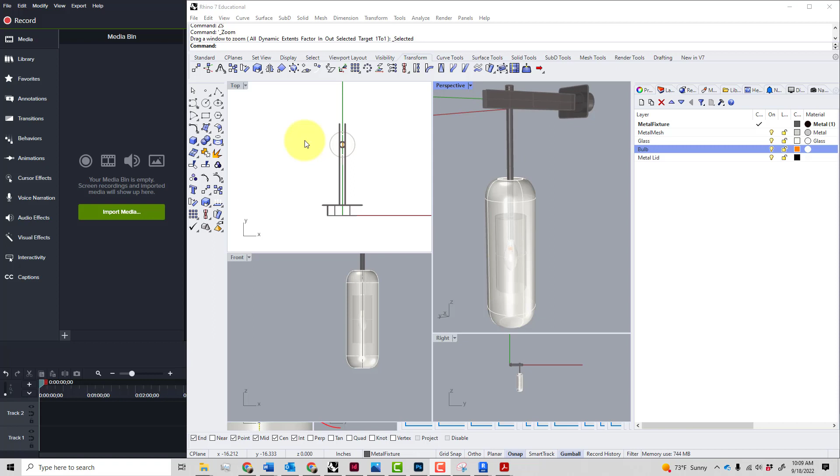So now that we've done the build of this light fixture in another video, here's the reference material I was using. The only things I haven't done yet are these clips. I haven't gone to that level of detail.

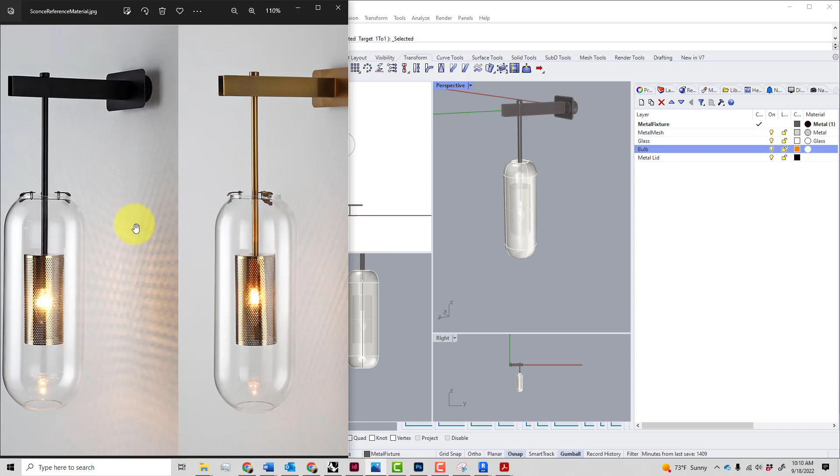The only thing that's not in the build video is I went ahead and put a lid on this. I wanted to see if I could block the light from going up. That's on its own layer because I don't want it to have the perforations. That's the other thing I haven't built.

It'd be really not fun to make a solid model that has perforations. In fact, it's counterproductive to render that. It'll take a long time, and there's other ways of doing it.

So we'll go into how to set up a material that will be able to handle a mesh like that, a perforation. The other thing I added since I made the video is this little orb in the center. There's not much going on there physically—it should just be the filament. But I'm playing with the idea that perhaps I can get a glow to happen right there that will hit the bulb.

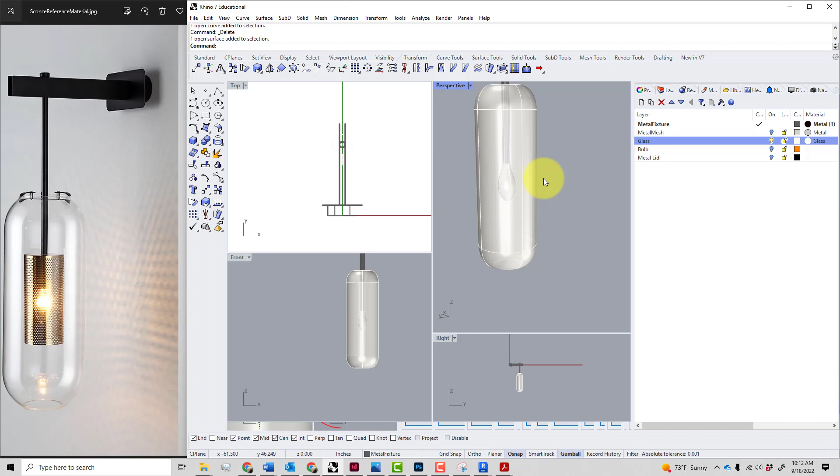All this is the glass. So I'm actually putting the glass bulb as still glass—that's that little orb I'm hoping I can get to look like it's glowing. And then that's that bit. So again, everything's set up, ready to go.

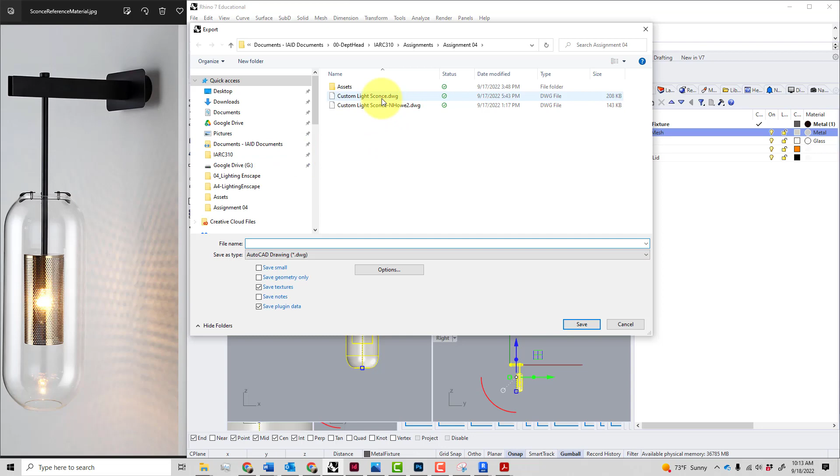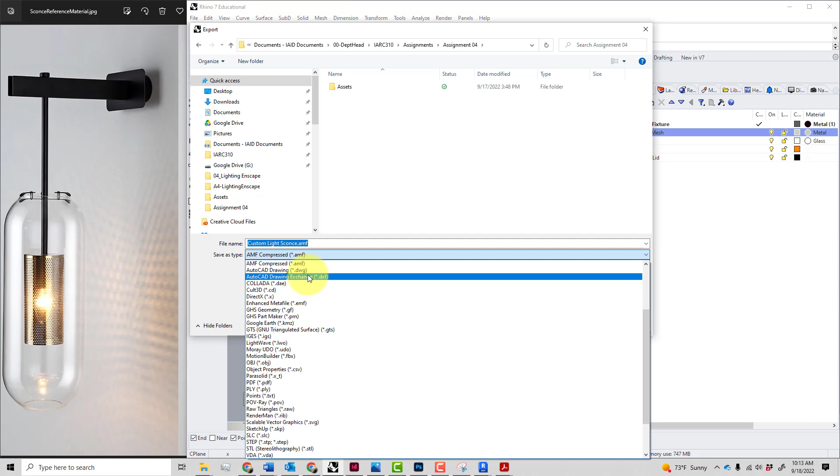Turn these things on, and our next move is just to select them, go up here to File, Export Selected, hit that, name it whatever you want. Make sure you're on DWG, not any of the Rhino formats. You'll want to be on DWG, and then go ahead and save.

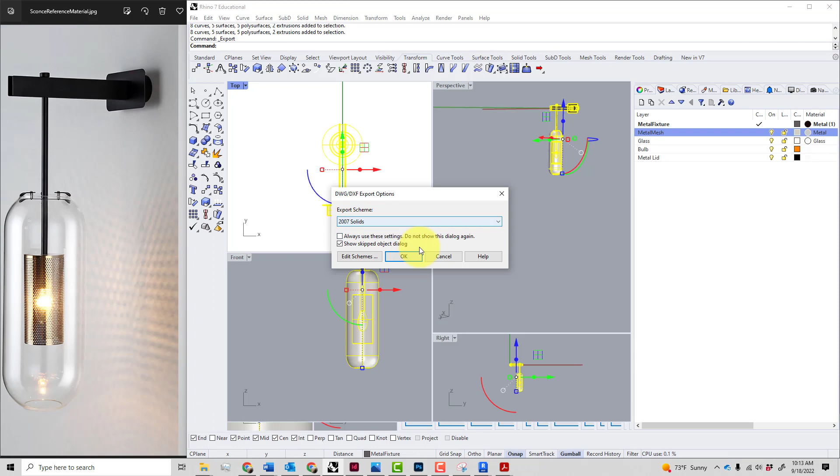When you get to this export schemes, you'll see you have a lot of different types. You'll want to still remain on the 2007 solids. It should be the default, but if it isn't, select that and say OK. That just makes sure you get solid information into the model, and it has some substance that can get materials out.

Okay, so that should be it in Rhino. You can do this with anything—furniture and whatnot. So just keep this workflow in mind.

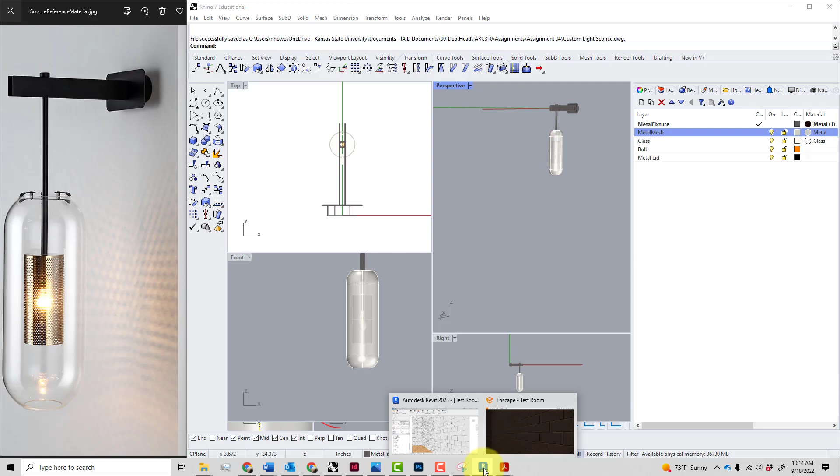Okay, so now we're going to be in Revit. What I want you to do is go ahead and go File, New, Family, and then under English Imperial, scroll down till you get to lighting fixture wall based. If we were doing a pendant, we'd want ceiling based. I've seen some videos that say you should always be face based.

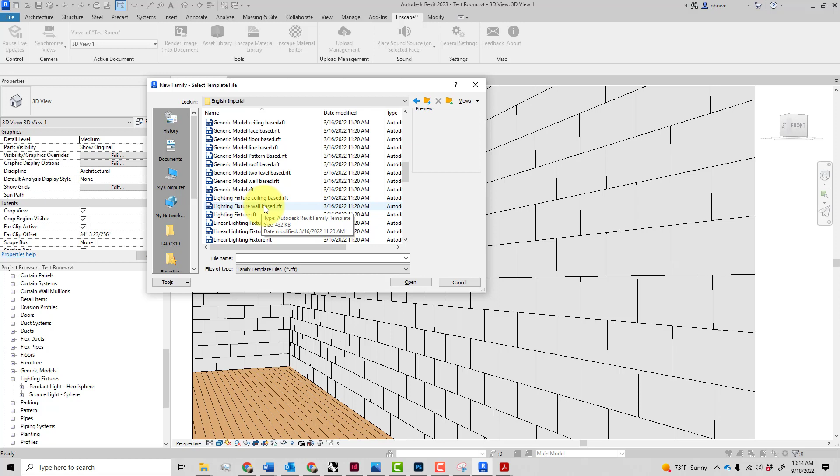I don't know, I think this will work, so we're going to use wall based. It's how any kind of sconce would have been built. So we say open that up, let's take a look. Alright, so you immediately see—

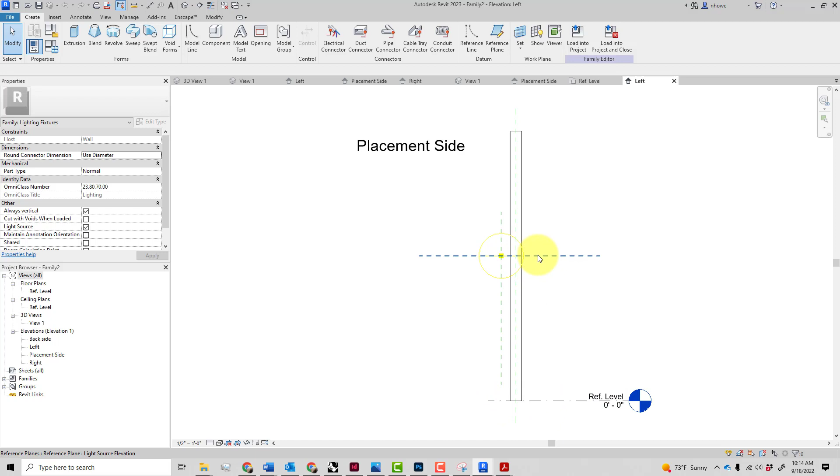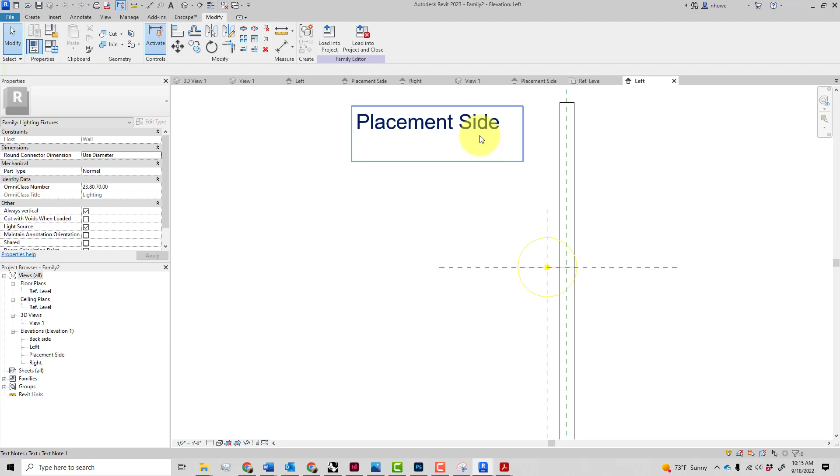We have the level, kind of the reference level—this is the floor. You have this light source elevation, you have your light source definition, and then you have placement side. In this case, whether you want it to be an interior, well it doesn't matter—wherever you're going to put the fixture, this is the side of the wall you want to place it on.

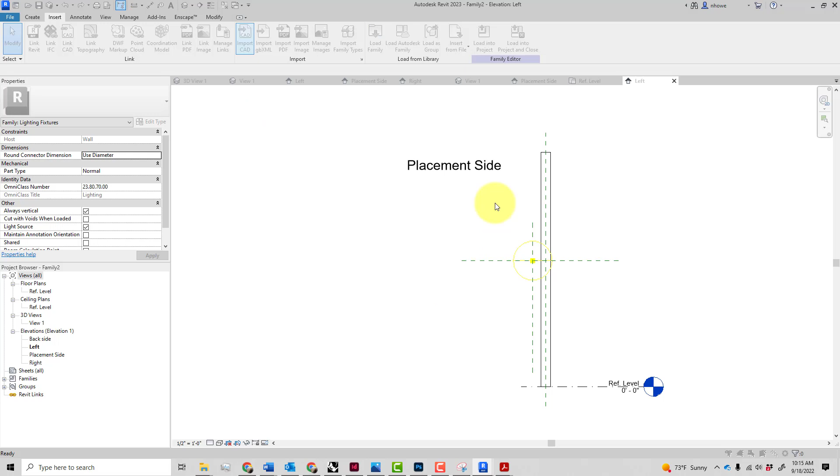Okay, alright, so from there it's pretty simple. We're going to go to Insert, we're going to go to Import CAD. Boy, I really wish they allowed link CAD. I've been going through this workflow for a bit, making sure I got things figured out for you guys, and that would be really nice. Alright, so it came in—import CAD.

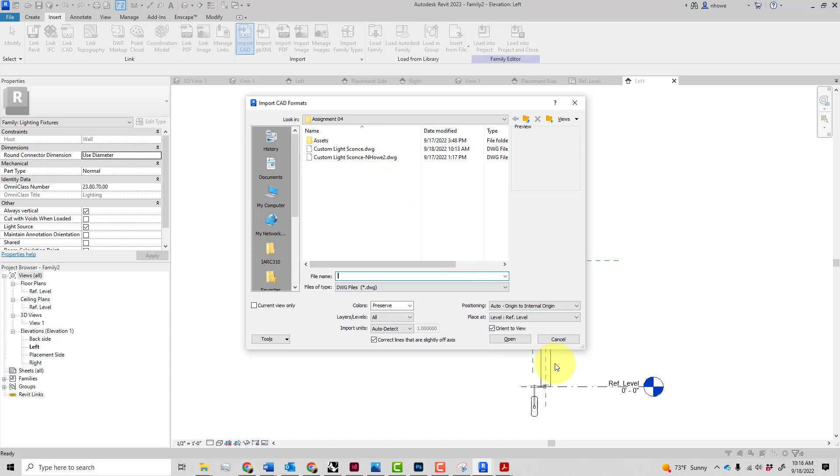I kind of went through that quickly—I used all the defaults, just don't change any of this stuff. So select your DWG and away you go. And you can see we're on left elevation, so this looks accurate, looks good.

It is pinned. I'm going to unpin it, and I'm going to move it up.

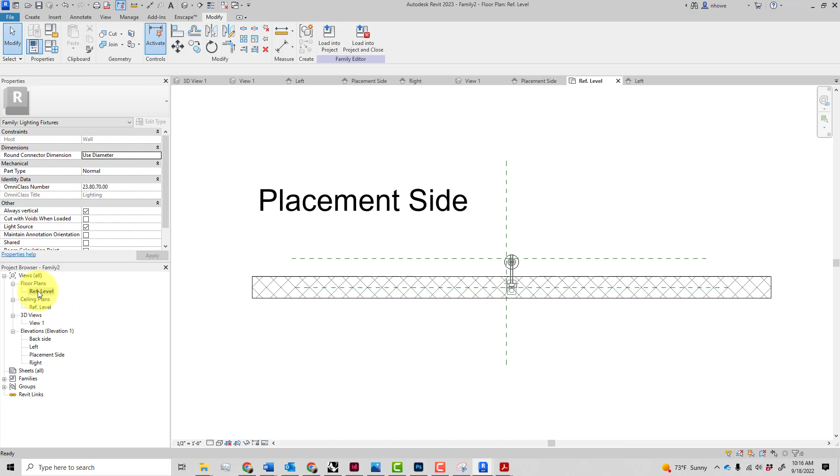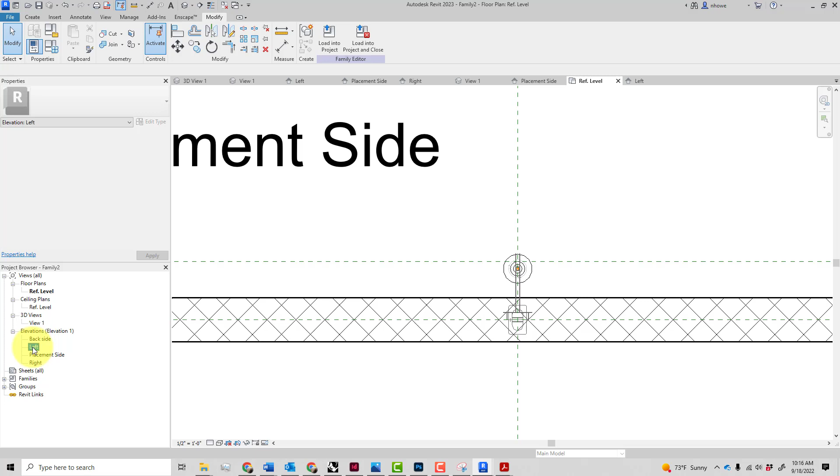First, let's go to the floor plan level. For whatever reason, it's coming just slightly off of center, so we need to move that. I'm just going to use the arrow keys to move it to center. I'm zooming in so I can get a little bit closer. I haven't had any problems with it shifting strangely, so that should be good, just moving it with the arrow keys.

I'm kind of being a little haphazard about it, but what I'm trying to do is see if we can have it snap to things, so let's try that. We're going to align it to the light source reference plane, and we need to find something it can reference. So that's horizontal. We're going to do that.

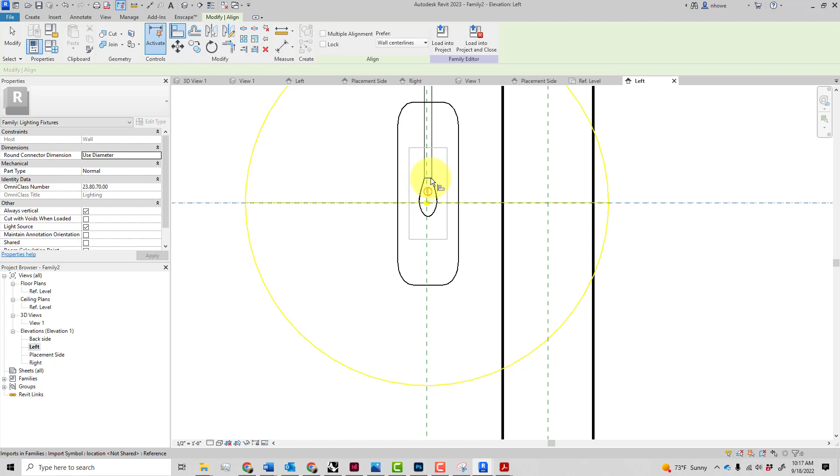I could lock it. I haven't decided I want to lock it yet. Now the next thing we need to do is get this thing to be flush with the exterior of the wall.

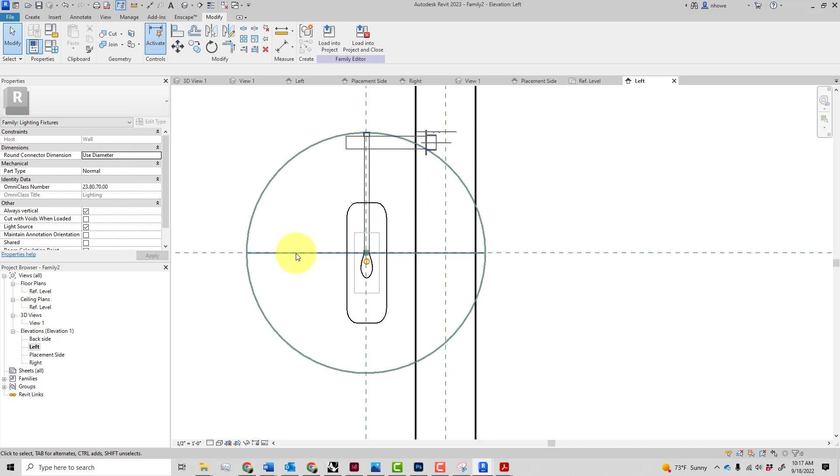So this is the thing you're going to be battling, and hopefully you don't, but it can be a bit of a problem. This wall has just got a generic wall on it, so right now this is not in the right place. Right? We want it to be...

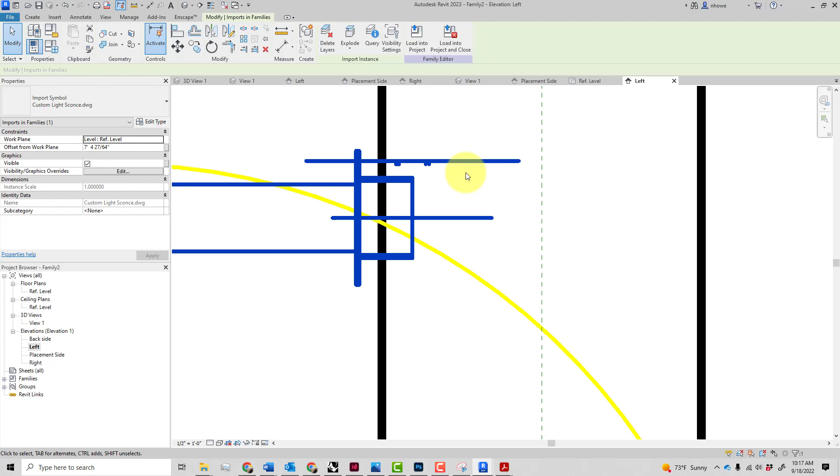I see some extra stuff. That could be a problem. I may want to export this again, but we'll see.

So you probably want this to be right there, right? So that looks good. If I go to a 3D view, it looks pretty good.

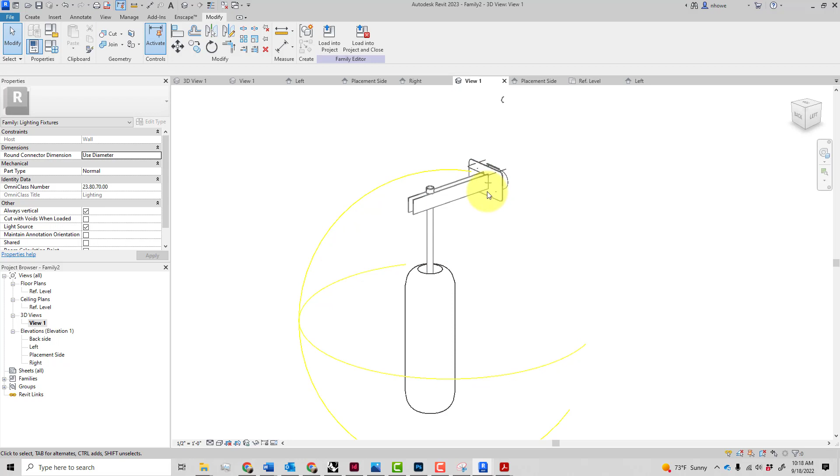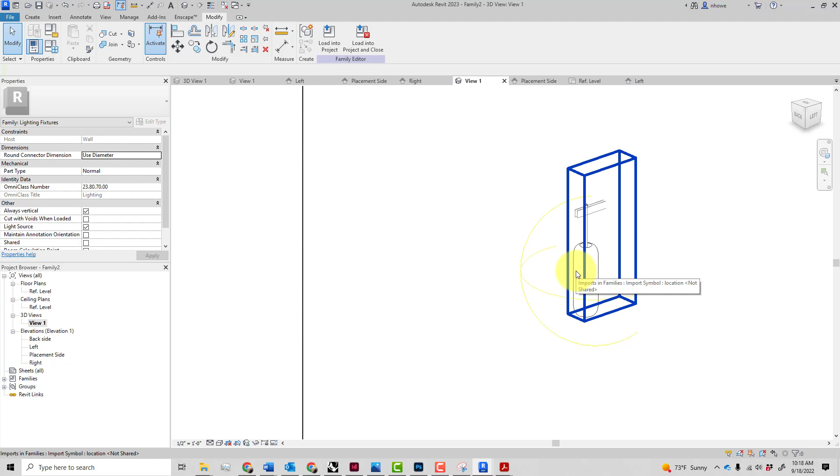But the problem is that when I actually place this in another project, and that wall is not 6 inches, it's 12 inches, you can see that this did not shift. My fixture did not shift with it. So I need to figure out an answer to that.

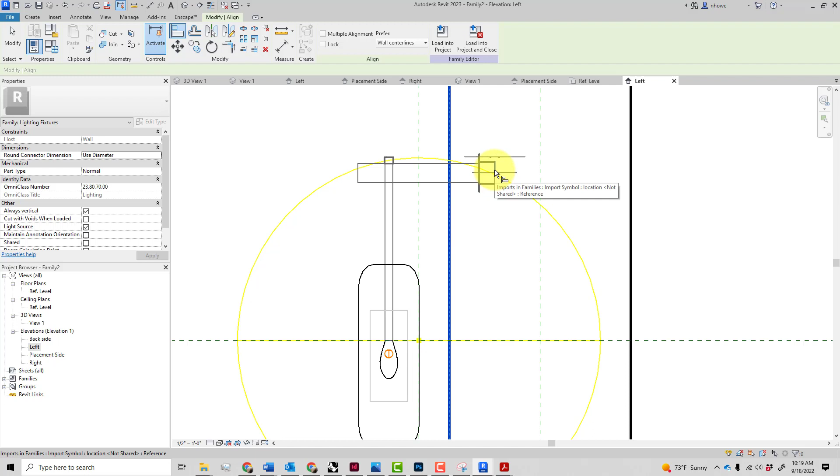So let's go back to the left. What we're going to do is align - I'm going to pick through, tab through until we get to that finished face of the wall. And then, hopefully you have something in your fixture that's parallel to that wall, so you just select that, and I'm going to lock it in.

So the hope here is that now, if I move this back to its 6 inches - bam, it moved with it. So that's perfect.

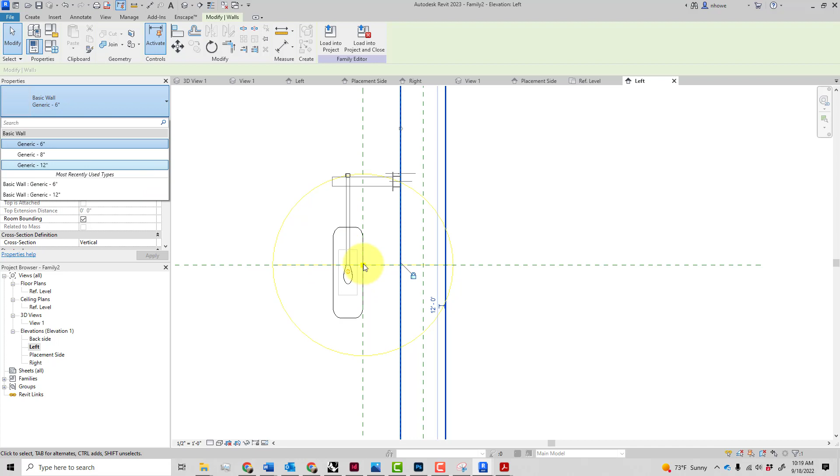Now one thing you might have noticed is that our light source has shifted, or not shifted correctly. So again, moving this back, see the light source is right here on the edge of the glass. Change it to 12 inches - it stayed the same, it's now even further away from where it should be. Alright, so we have the same issue with it.

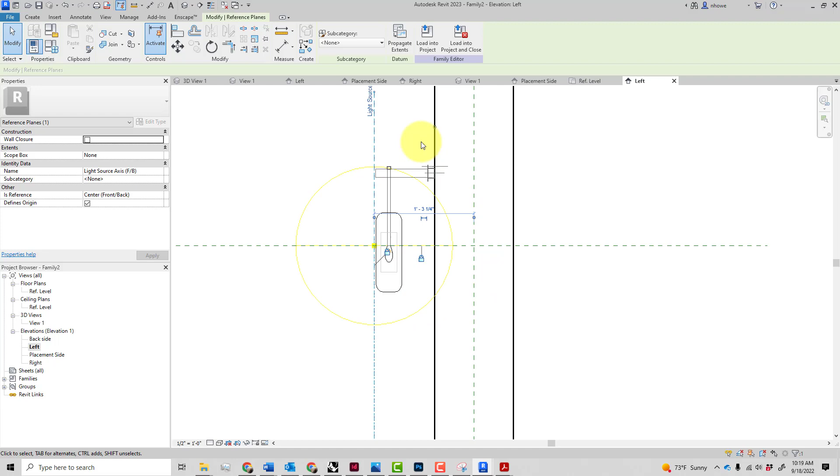So what we need to do is move this to be at the appropriate place, but that would be similar to what we were doing, which is physically moving this. I move this back to 6 inches, even though it's perfect now. If I now have a 12-inch wall, I go to 6 inch - now it's outside.

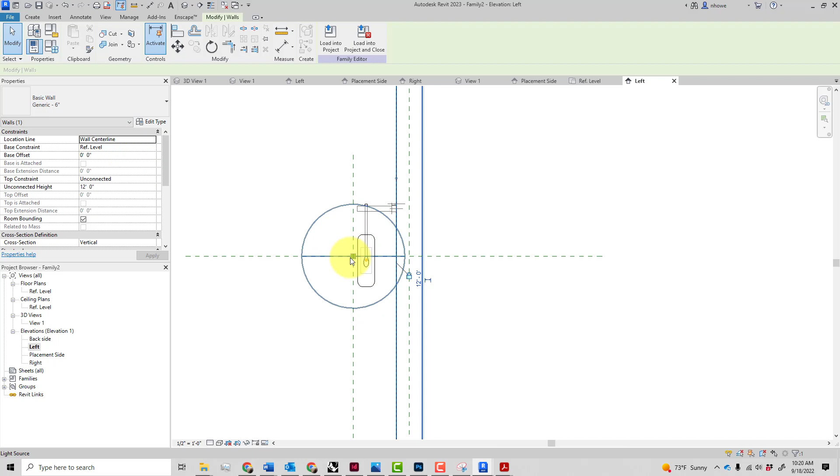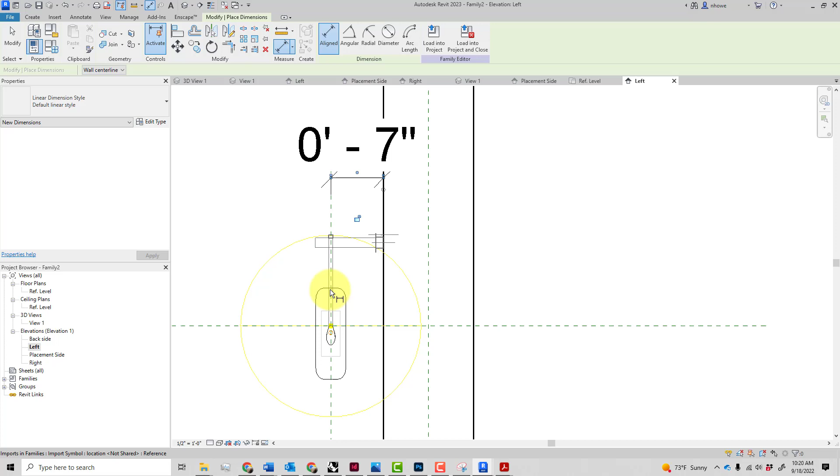So what we're going to do is take a dimension and dimension this, and it's important that you get to the exterior of the wall, because the fixed dimension - I've modeled this to be 7 inches away from whatever type of wall it is. Doesn't matter what type of wall, but from the finished face, I'm 7 inches away. So this is the critical dimension, and I'm going to lock it in.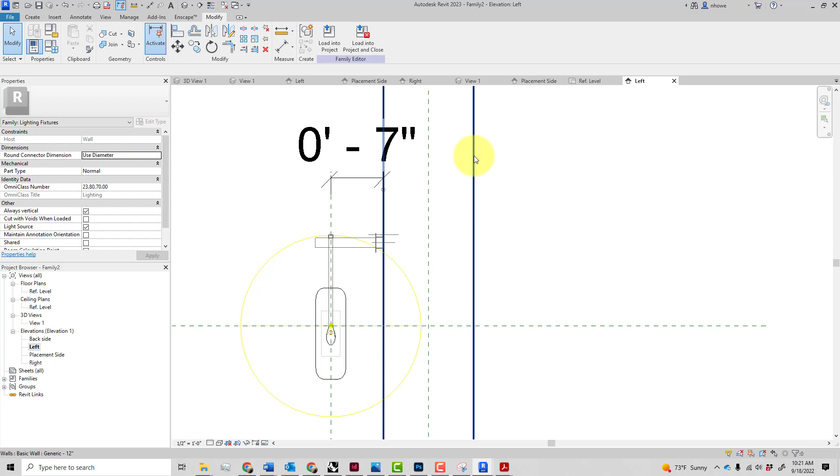Okay, so I've dimensioned to here, to the interior of the wall, and I've locked it in, and let's see what happens. These are critical things - you just got to figure out how your fixture is built, or any kind of customization built, and then how to use that to manipulate it.

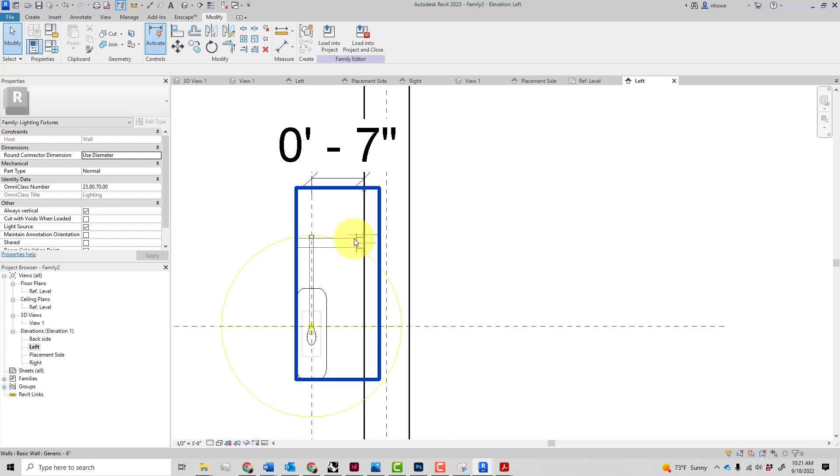Still a little worried about some of these extras. I don't know if they're curves or whatnot. Hopefully they're not showing up. Oh, there's an extra something there too. Well, we'll see what ends up happening.

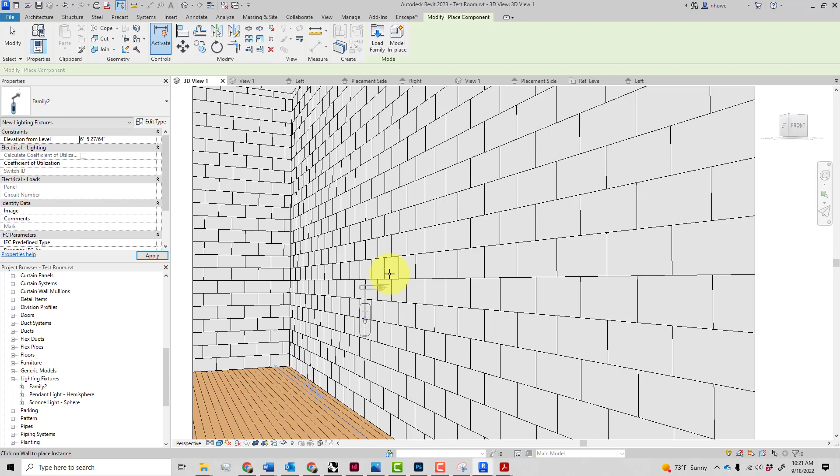Okay, so that looks pretty good. I'm not sure about the height. It's a little high - bring that down. Okay.